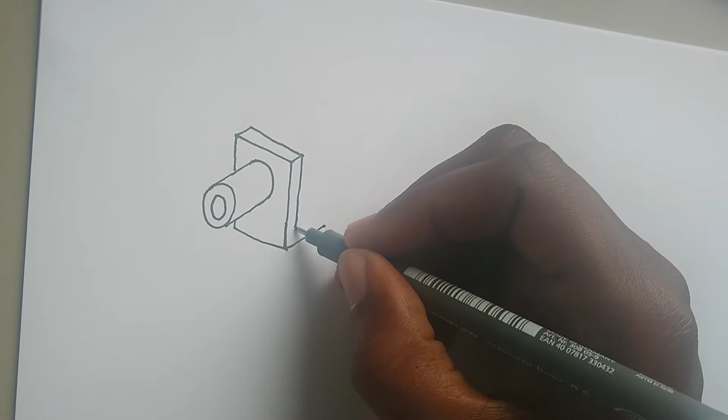The first thing done is I have drawn an isometric figure which has a cylinder protruding on the left side, and it has a right side which is in the shape of an L. I am putting in the center line. Now that center line is also going to be used as the cutting plane AA.

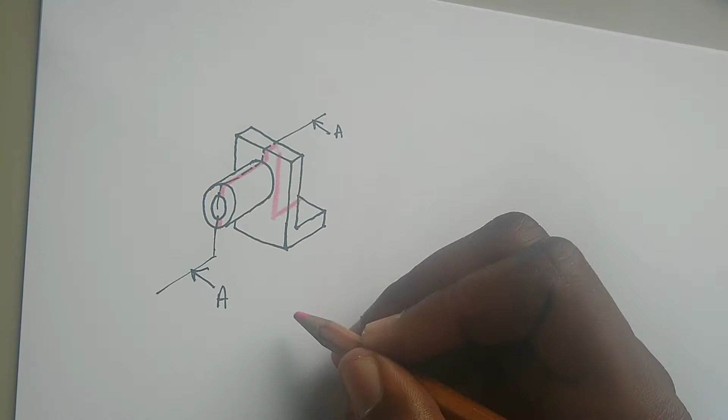What I'm doing with the crayon is marking exactly where AA cuts the material. So when you look at the line AA, it will cut directly or exactly through that pink area. And that gives us the shape for our sectional elevation. You must focus on where the cutting plane cuts the work.

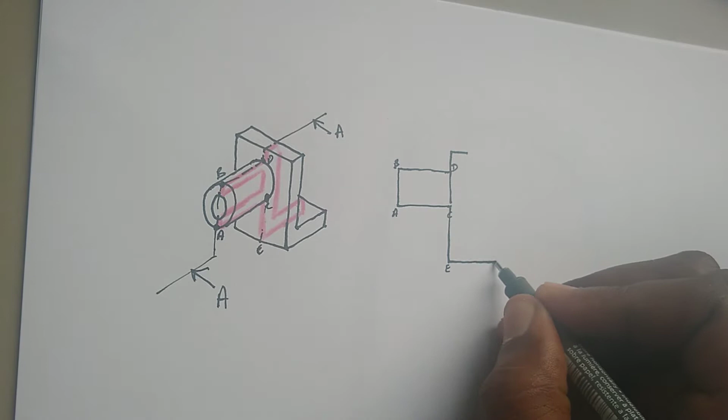I have labeled some points A, B, C, and D so that you can understand where exactly these different points are. The last point that was marked is point E. I'm using the whiteout to erase that line on the left.

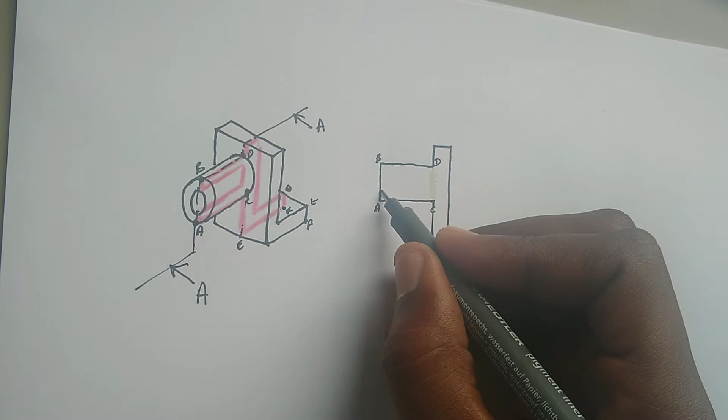Now I'm preparing to section the material. The cylinder is cut through the middle. It has a hole, hence the reason why there is a space. And I'm filling in the last part of the cylinder now. I am sectioning the isometric drawing, the cut portion of it, so you can see exactly where it will be sectioned in the front elevation that I'm doing.

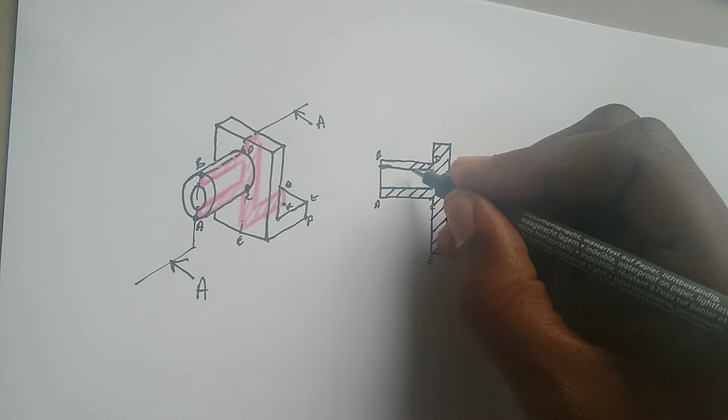So this sectional elevation is the cut portion of the isometric drawing. And I'm labeling the drawing at this point, sectional front elevation on plane AA.

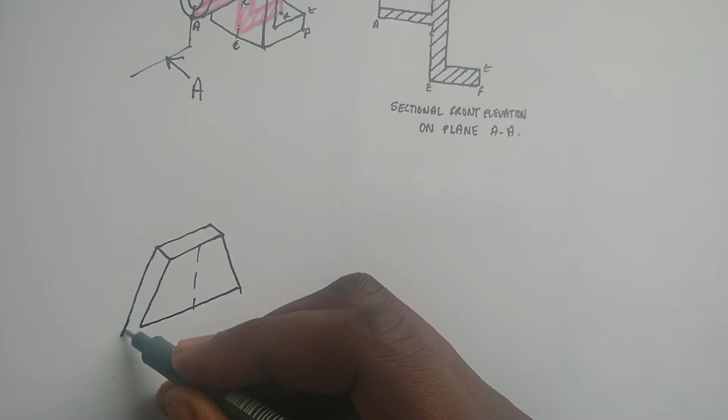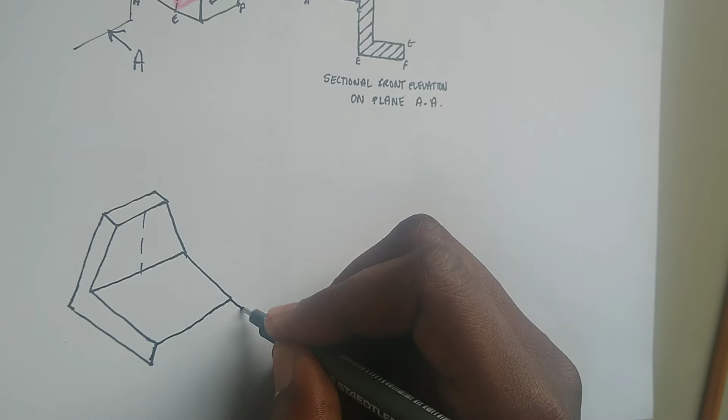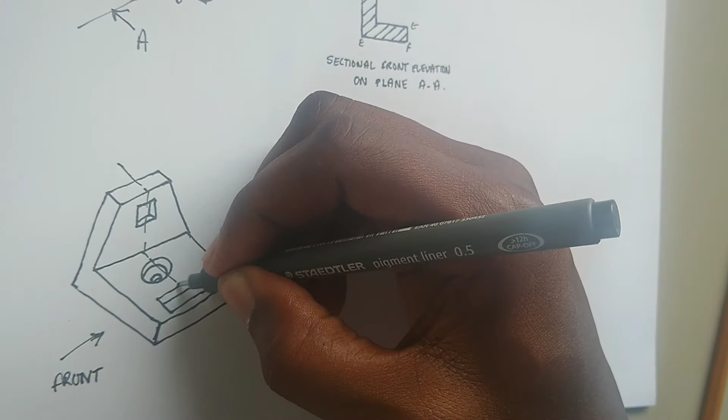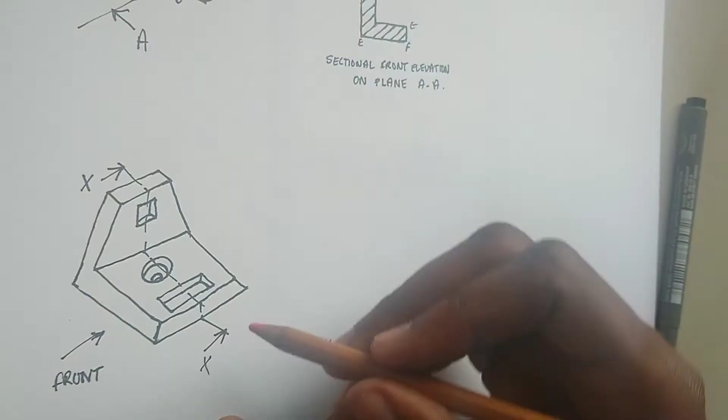So we're going to draw the front elevation from the direction of the front arrow. I have put in the center line. That center line will be used as the cutting plane. It's called XX. So when you're doing a sectional elevation, you must pay close attention to where the cutting plane cuts the material. I'm using the crayon to show exactly at what points will the material be cut.

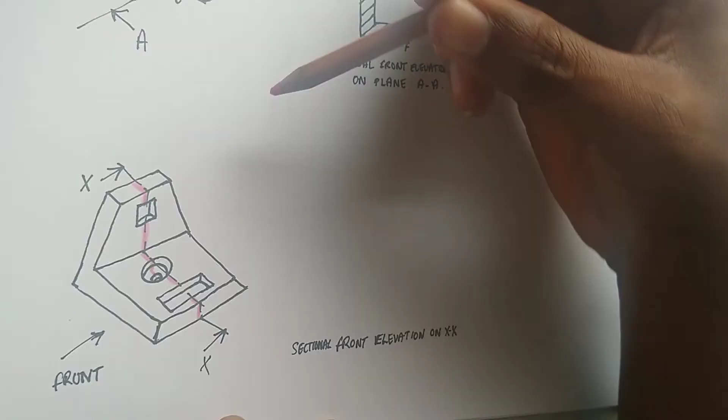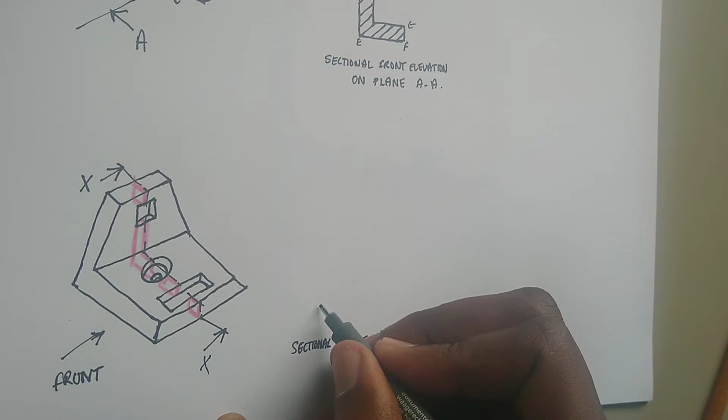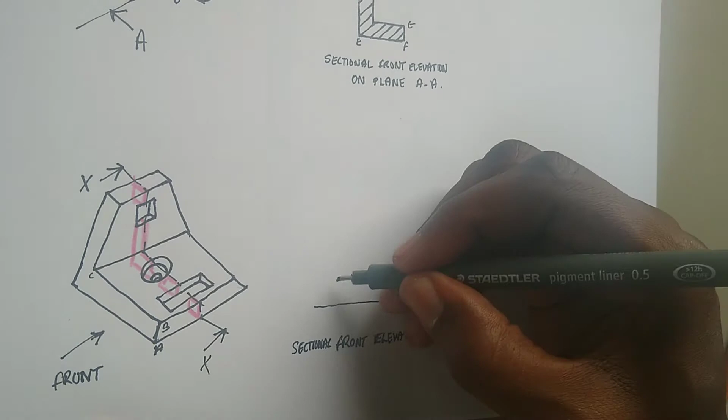I'm showing exactly where this material is going to be cut. And what this is going to do, it will help you to better understand what the sectional elevation is going to look like. Beginning to draw the front elevation, I am going to label points A, B, so that you can try your best to understand how we're carrying the isometric drawing over to orthographic. So those are the specific points from the figure.

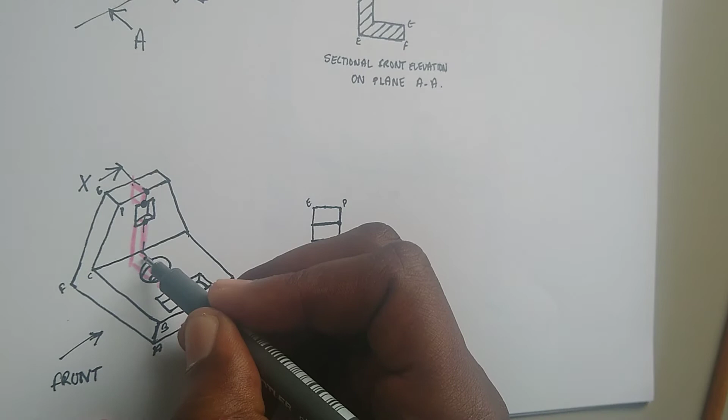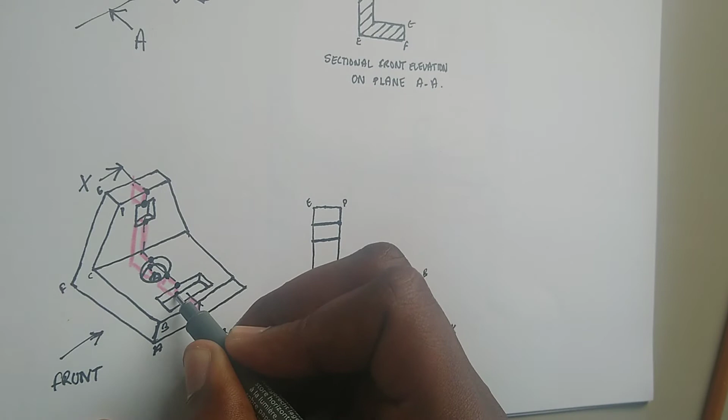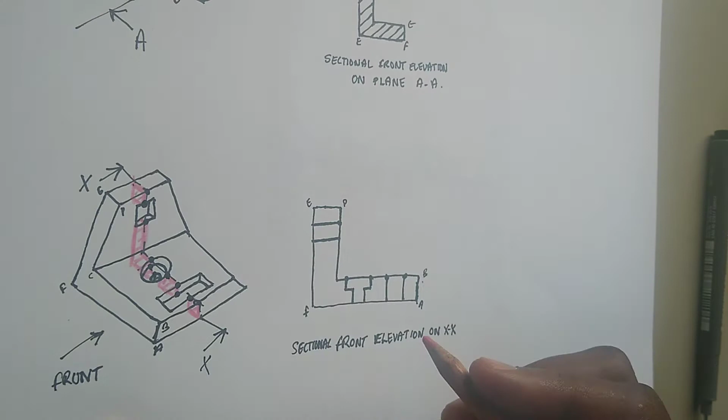So this cut portion at the top will be a little rectangle. That is a space for the square hole. We have the L piece that goes directly to the circle. You will see that there are two circles here, a big one at the top and a smaller one. Hence the reason why this part may look like a T. We then have a straight line and our square, the area for our rectangular hole cut out. I'm sectioning with the crayon so that you can see where exactly the sectional lines will be placed.

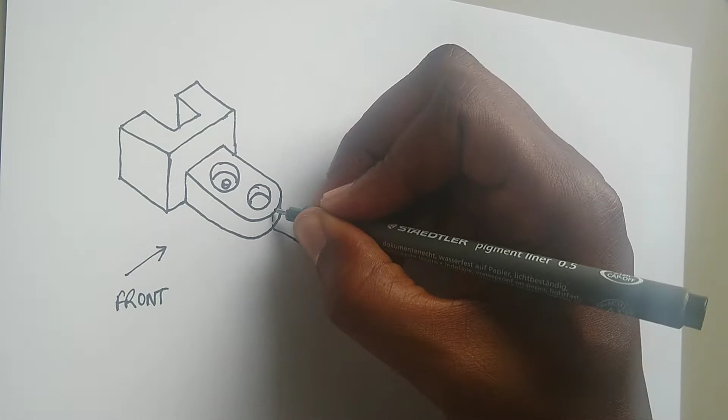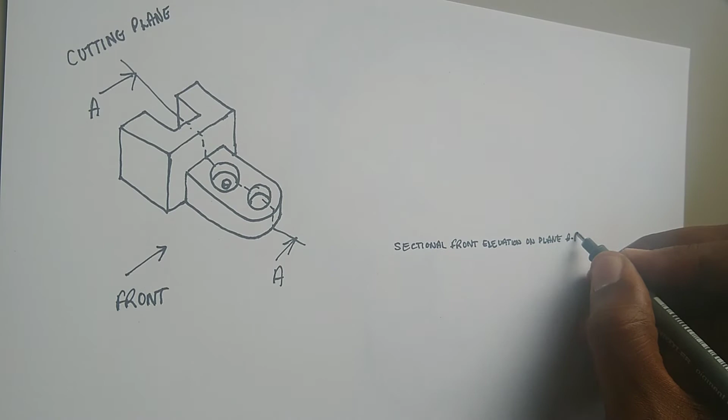We're drawing another figure, another example. Taking a sectional view from the front, the cutting plane is shown as A. Remember, you look directly where the cutting plane touches the material. I will use the crayon to show exactly where that cutting plane touches the material. So you need to identify what is solid and what is not. Is it passing through a solid area right now, or is it passing through a space?

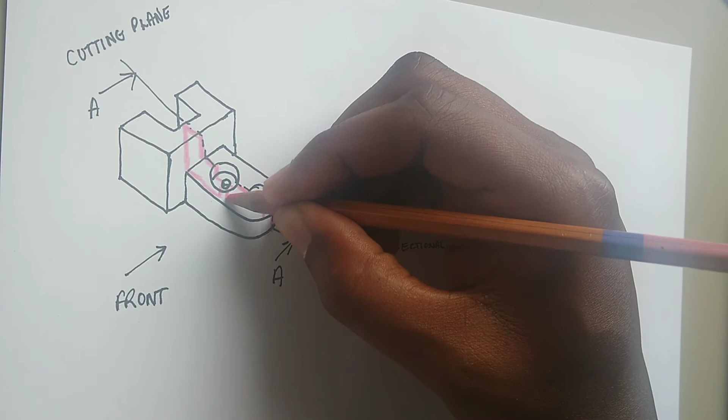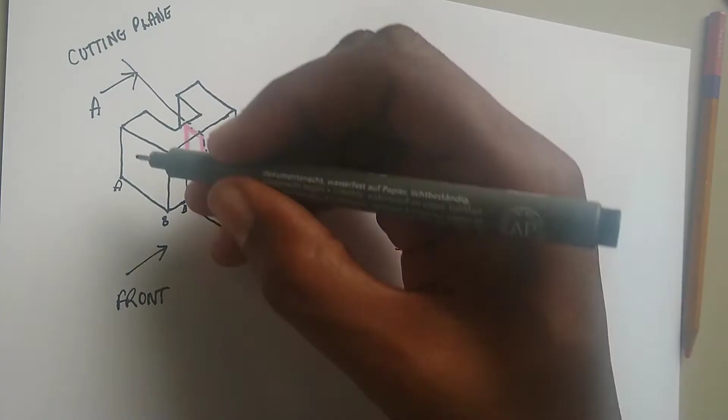That first, the left side, it looks like an L. You then have a little space in the middle and then a smaller one to the right. Now we're going to begin to draw this front elevation from A to point B to point C. The height A to D, and you realize that the back part, that left part, is high while the right part is low.

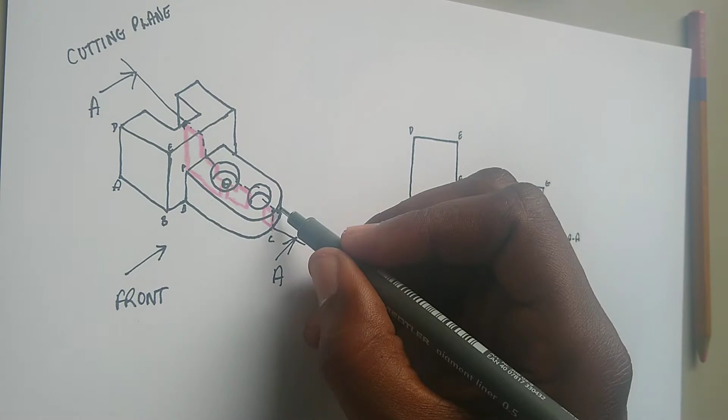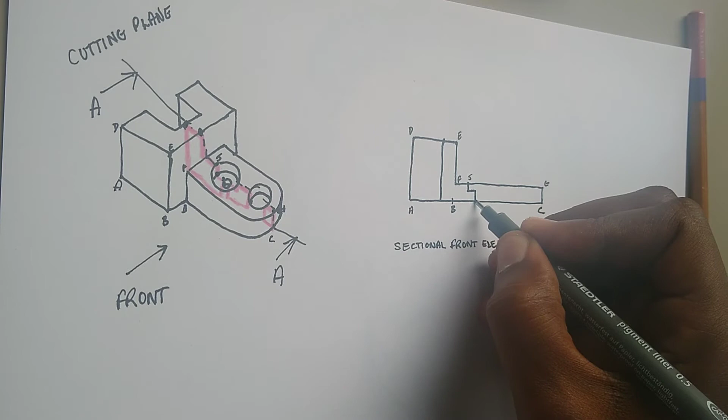However, it is cut a little further in. So that first point, which we'll make there from E, we have the start space going across. It comes directly down. You can follow the pen as I move it. Once again, we have a hole, a counterbore hole, which has a smaller circle in it at the bottom. So that counterbore hole looks like a T. And then we have a straight cut hole.

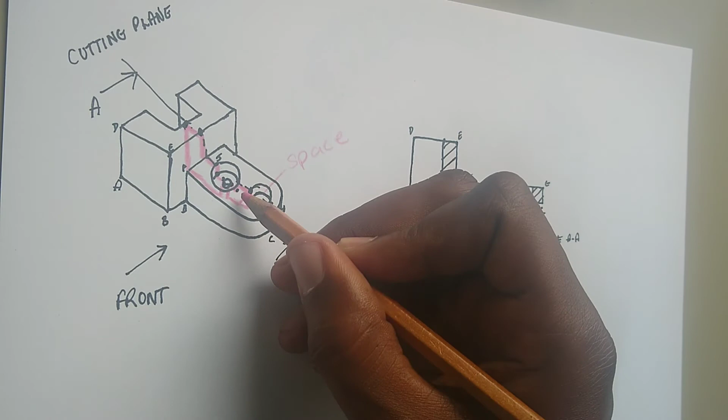And at this point, I put in the sectional lines, the hatching lines. These lines are exactly where the drawing is going to be cut. So you may realize that the space is not sectioned, but the solid area is sectioned. Space, not sectioned. Solid material is what is sectioned.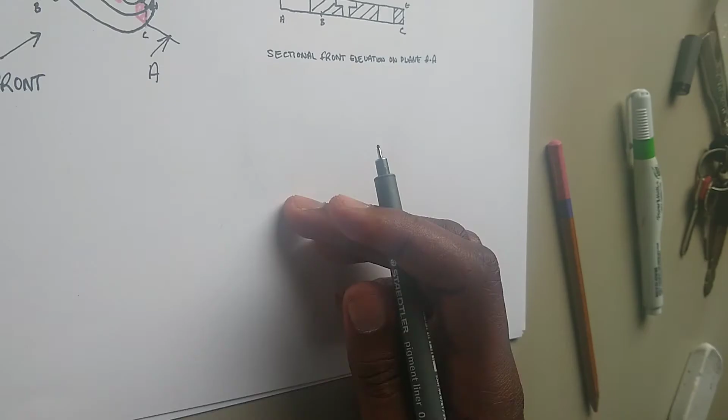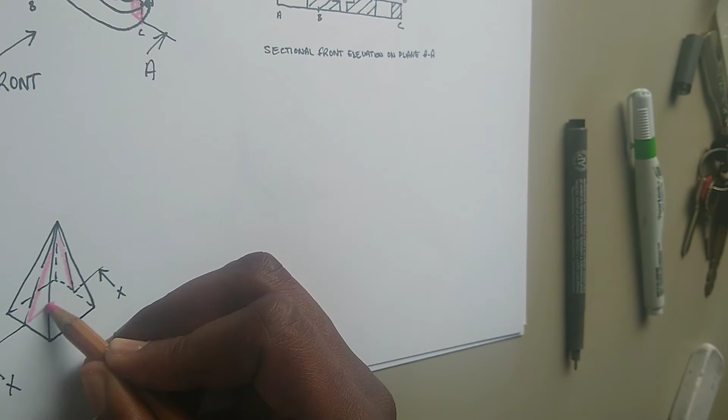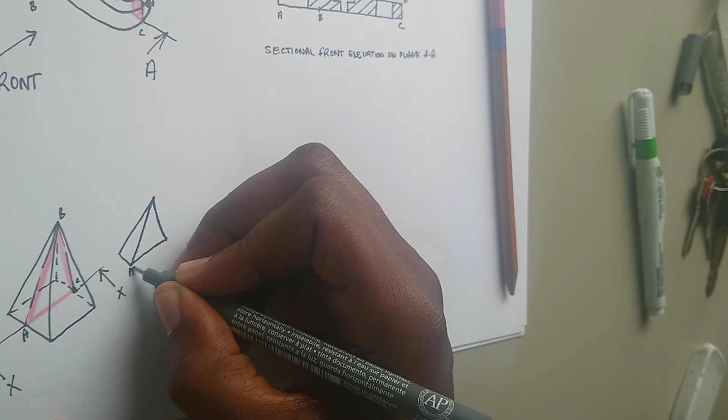At this point, I'm sketching a solid figure. So this solid figure is a pyramid, and we're going to cut this pyramid to see what the sectional elevation will look like. Once again, I use my crayon to show how this figure would look at the point it is cut. So you will see the backward half from the points A, B, and C. That will be the cut portion.

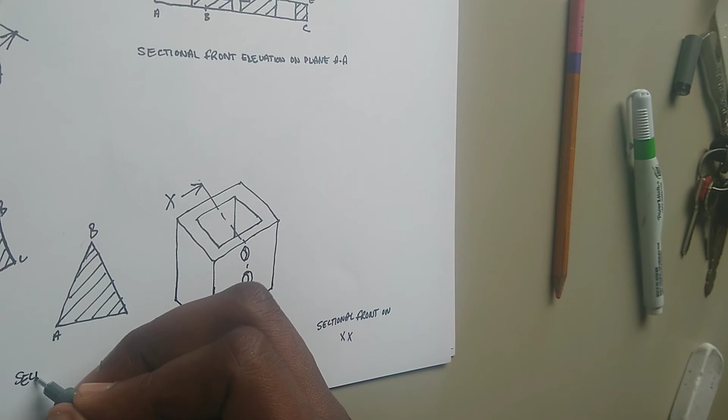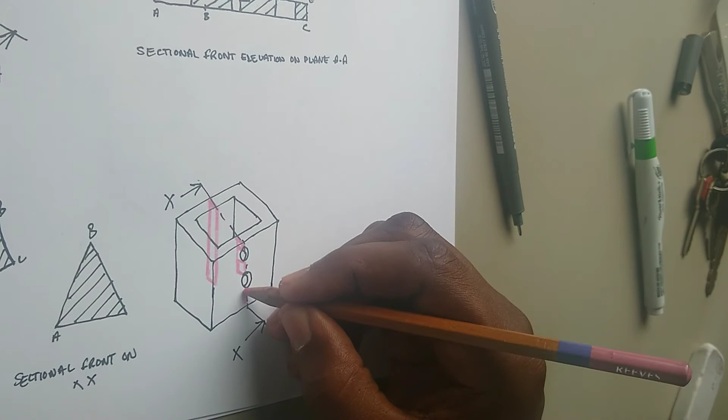Drawing one final block. Now if you take a look at the figure, it looks in the shape of a square, a rectangle, a rectangular prism. You're looking for where XX cuts the material, and what shape you would see in the background. So on that left side, XX comes through the thinner portion. On the right side, you can see there are a few holes. So at some points you will have some spaces in the material. And these are the spaces that you will have to leave out when you're drawing your hatching lines.

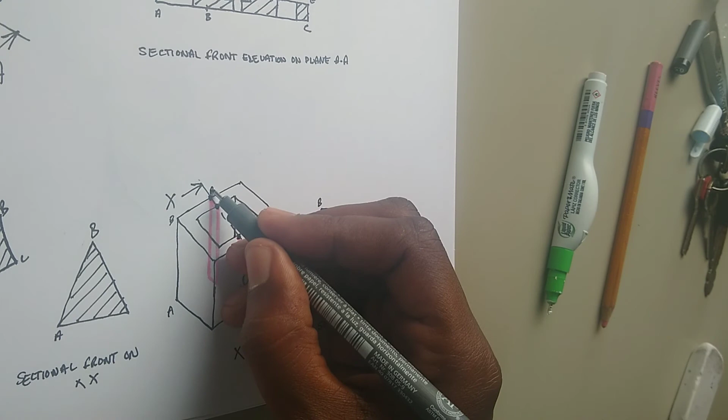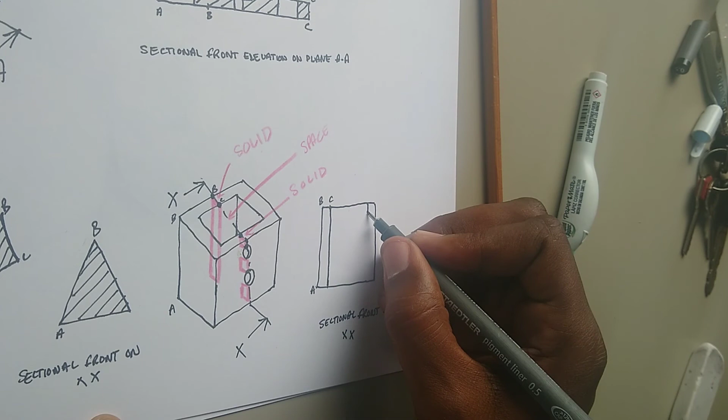So as we begin to draw the orthographic view of the block, XX, we have A to B. You'll realize that there's a point C in the background, which is the top of where it is cut. The space that was just highlighted is in the middle of the material. So on this figure, where the cutting plane is, on the left side, there's a solid portion, while on the right side, there's a solid portion. But in the middle of it, there's a big gap.

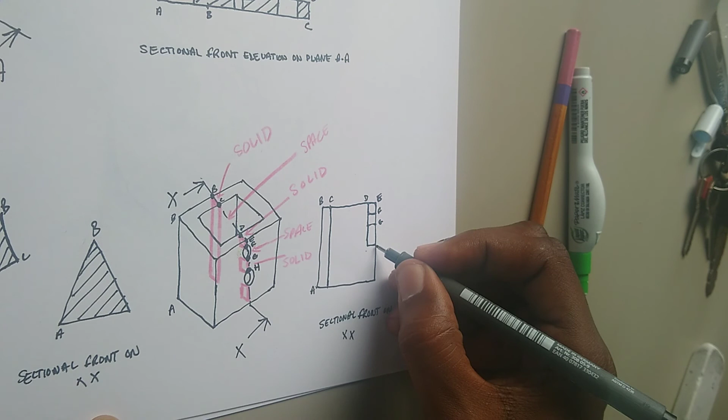On the right side though, since there are circles or holes going through the material, there are going to be some spaces and there are going to be some solid portions. So pay close attention to how the right side is done, because you must show the holes that are being cut through, and you must show the solid parts of the drawing that are being cut as well, and that will determine what will be sectioned, as is being marked out now. So the hatching lines are not placed on the spaces, they're only placed on the solid parts.